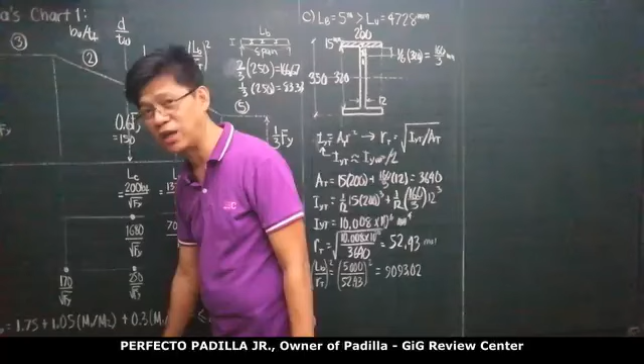Klaro tayo? So therefore dito ngayon, yung M1 is the smaller moment, kaya M1 over M2 is less than 1. However, may provision yung NSCP kasi kapag simply supported, M1 over M2, 0 over 0, indeterminate yan, hindi yan kaya ng calculator.

So pagka simply supported and cantilever, a CB will be given a value of 1. Naintindihan? And also kapag yung M1, yung moment in between, between the beam from end to end, yung moment sa gitna is bigger than the moment either M1 or M2, this will also be given a value of 1. But CB cannot be more than 2.3. In our problem, since wala mang binanggit, we just assume that our beam is simply supported. Kung simply supported, therefore our CB will be 1. So assume beam to be simply supported.

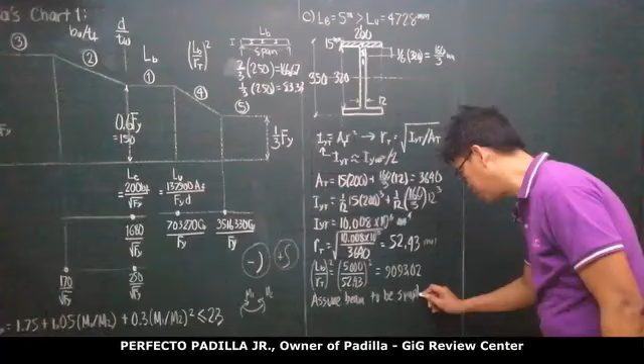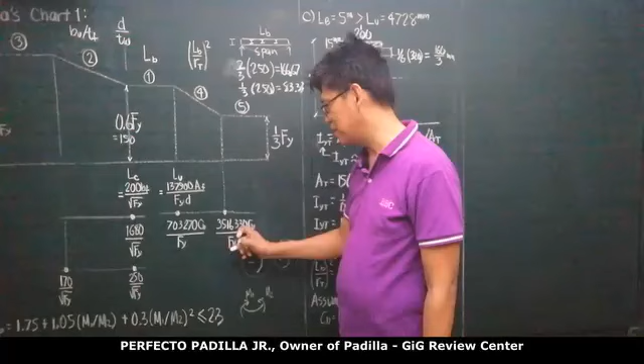Kung simply supported, yung ating CB is equal to 1. Let us compute this. Ang tatandaan nyo, etong quantity na to should be 1/5 of this. May konting discrepancy kasi yung NSCP nag-ground off, tapos nag-regenerate ng code na wala masyado yung exact 1/5. Pero the value of this must be 1/5 of this, or this is 5 times of this. So eto na lang, mas madaling memorize to kasi 7 digits: 35, 16, 330, CB.

Merong explanation sa psychology bakit mas madaling i-memorize ang 7-digit number kaysa 6 digits. Kaya yung mga telephone number natin, ba't hindi 6, ba't hindi 5 digits, di ba? Ang telephone number natin, 7 digits yan. Okay, so 35, 16, 330, CB over FY.

Ito, 1/5 of that, pwede nang hindi nyo kabisaduhin to, 1/5 na lang nito, parehas lang. Konti lang yung diferensya. Dapat eksaktong 1/5, pero nag-round up man yung NSCP. Pero yung difference, konting-konti lang, hindi siya material. Okay, so kwentahin natin to.

Yung ating 35, 16, 330 CB over FY will be 35, 16, 330 times 1 over FY. Yung FY natin is 250. Tawagin natin tong SR2, slenderness ratio 2, SR2 na lang. So dito ngayon, when we compute that, it is 14,065.32.

Tapos yung SR1, yung 703,270 CB over 250 or over FY. So this is 703,270 times 1 over 250. You compare this. This is...

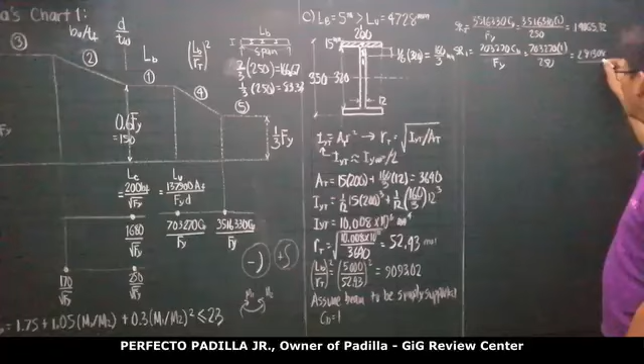2,813.08. Subukan nating i-multiply by 5. Pag minultiply mo by 5, it is 14,065.4. Ito 0.32, konting diferensya lang, di ba? So pwede nang ito divide by 5, ito yon, or ito times 5, ito yon. So ibig sabihin, isa lang sa dalawa ang i-memorize mo, okay na.

Now, our LB over RT squared is 9,000. Ito ay 2,813. Ito ay 14,000. This is between SR1 and SR2. Between siya nito at nito, ibig sabihin, nandito yung beam natin. So therefore, beam in region 4 of Padilla's chart.

Ang ibig sabihin nito, our FB allowable is between 0.6 FY and 1/3 FY. Ito, 0.6 FY which is 150. Ito is 1/3 FY which is 83.33. Kuha nyo? Maliwanag po. So paano natin ko computein? 150 kung ang value nito, ito. 83.33 kung ang value nito, ito. Ang value nito between this and this, nandito banda.

Correct? Ito yung kailangan natin na FB. You get it? So makukuha natin yan. May formula na nasa code, pero pwede na rin na ratio and proportion, parehas lang ang result. So ang gawin nyo na lang is mode stat, linear, A plus BX, straight line. Ito yung X, ito yung Y.

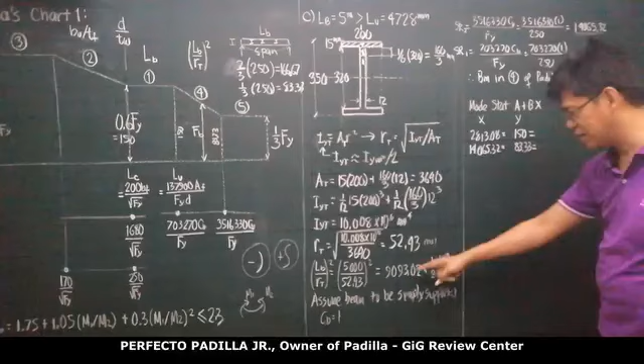83.33 equals. Kailangan natin ang Y for an X, yung X natin ay LB over RT, between 9,093.02. So pindutin muna natin yung AC, tapos yung value nito, 9,093.02. Then i-activate mo yung regression function ng calculator.

Shift 1 regression. Hanapin niyo lang yung equivalent nito sa Canon - shift up regression doon sa Canon. Pero sa Casio, shift 1 regression. Dito, pagka naka-regression ka na, meron table, papipiliin ka anong hinahanap mo.

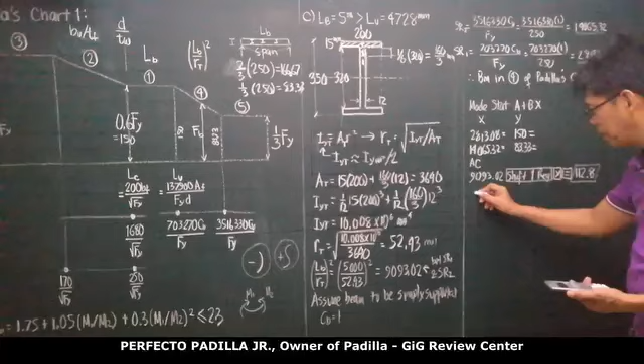Ang hinahanap natin ay Y, piliin mo yung key para sa Y, then press equals. Ibibigay sa'yo ng calculator yung sagot - yan yung FB mo. And you'll get here 112.8 megapascal.

So therefore, according to NSCP, FB allowable equals 112.8 megapascal. However, may isang provision ang NSCP, kailangan din siyang i-compare sa isang formula. Lahat nasa Padillas chart yon. Di ba napunta tayo dito dahil ang LB mo ay greater than LU. Tandaan natin, this is 0.6 of FY.

Yung 0.6 of FY na yan, compare with 0.6 of FY pero i-multiply mo ng LU over LB. Napansin niyo may bagong element na pumasok dito, yung CB. I-multiply mo to ng CB. So meron ka lang adjustment na gagawin dito, yung 0.6 FY mo i-multiply mo nito. Subukan natin - it is 150 times.

Ano yung LU? Our LU is 4728. Bali marireduce ba? So it is 4728 over our LB which is 5,000, multiplied by CB which is 1. So this is going to be 141.84.

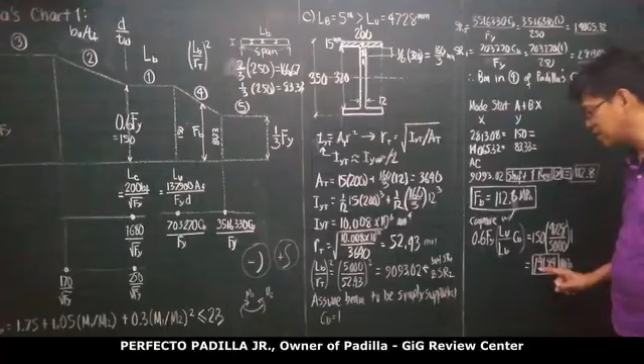Kung ang nasa choices ito yung sagot, kung parehas nasa choices, then go for the more economical one. Gusto kong examinin ninyo itong portion na to ng formula - yung portion ng formula ko na eto, minultiply ko ng LU over LB times CB. Pagmasdan niyo yun, ito yun.

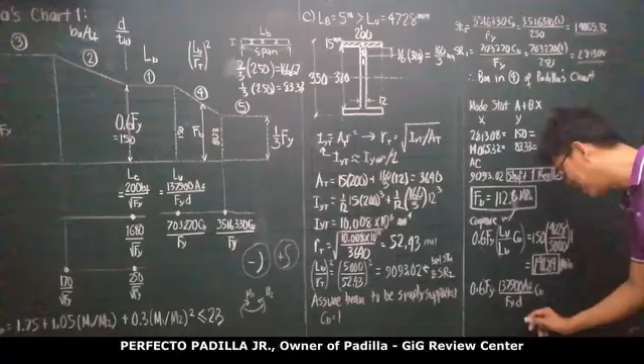So I have 0.6 of FY, ano yung LU? 137,900 AF over FYD. Tama, over FYD. So i-multiply natin ang CB. Di ba yung FY pa-cancel? Correct. Ang formula magiging ilan?

Magiging 82,740 AF CB over D. Hindi ba ito yung formula na makikita niyo sa NSCP? Tama, parehas din lang.

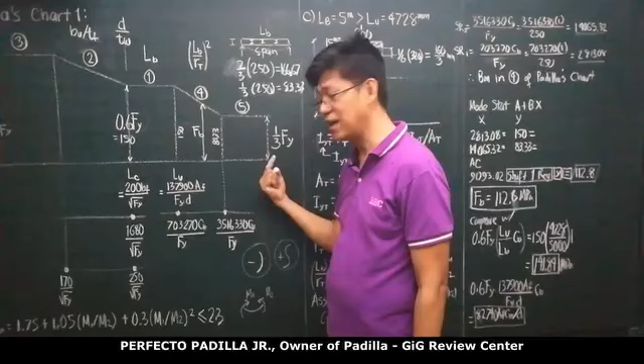Bali, pag napunta ka sa Region 4 o Region 5, kailangan i-check mo yung value na ito to be multiplied by an adjustment factor equal to LU over LB. Kasi ito is greater than this one, kaya ang multiplier mo ay reduction factor - i-reduce ito ng ratio nito sa kanito. Pero meron pang another factor, yung CB.

What about this problem? We have here a 150 mm concrete slab supported by a steel beam, simply supported at 4 meters, meaning from support to support 4 meters. Ang distance ng support perpendicular sa chalkboard is 4 meters. This beam are spaced every 5 meter center to center, meaning each beam has a tributary or assigned width of 5 meters. So ang sakop nito is 5 meters width by 4 meters length.

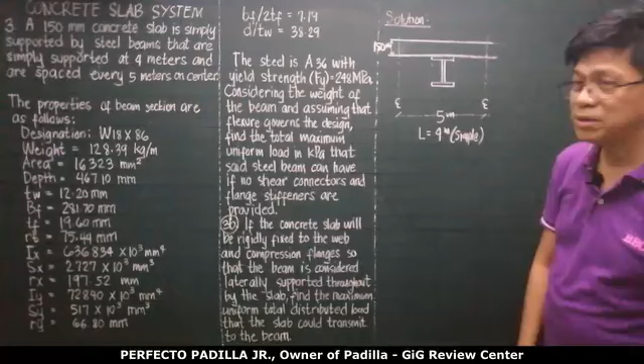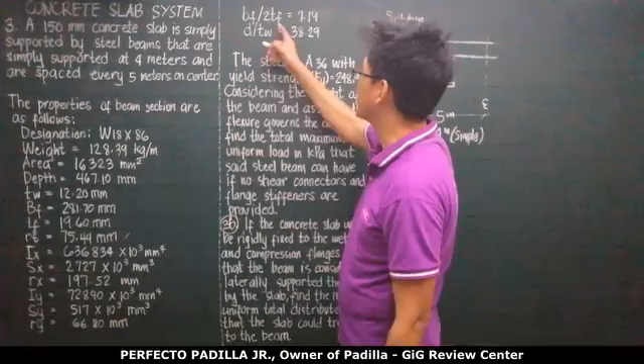Ang sabi sa atin, the properties of beam are given - yung IY, SY, IX, SX, everything, pati yung RT given sa atin. Ang sabi sa atin, yung steel is A36 with yield strength of 248. Binigay na rin sa atin yung BF over 2, ito yung BF over 2TF, at yung depth to thickness of web, binigay na rin.

Ang sabi sa atin dito, considering the weight of the beam and assuming that flexure governs the design, meaning we don't have to examine the shear, find the total maximum uniform load in kilopascal that the said steel beam can have if no shear connectors and flange stiffeners are provided. Ibig sabihin, yung slab hindi nakakabit sa beam, nakapatong lang. Kung may connection man, the connection is not sufficient in order to develop composite action.

Naintindihan? Okay, let's have it. Ang sabi sa atin, flexure ang mag-govern. In order to be safe in flexure, ano dapat ang requirement?

The maximum FB actual must be less than or equal to FB allowable. Our FB actual, since this is a simply supported beam, would be MC over I. The load is here, so the bending is about the neutral x-axis. So this is MX, this is IX. But I over C, we know that to be SX, so we can write this as MX over SX.

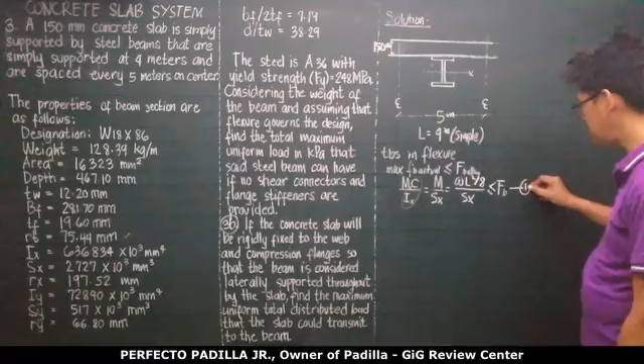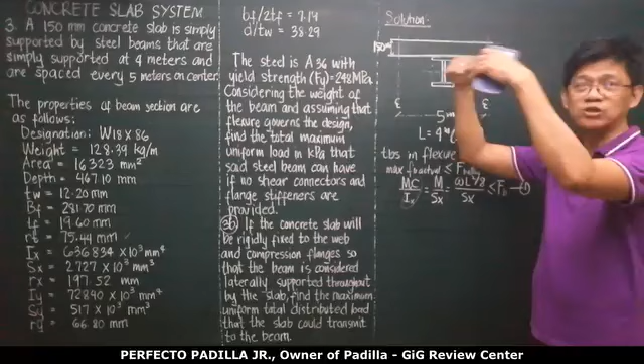We're told that our beam is not connected to the slab, meaning there is no lateral support provided except the vertical support of the beam, or the simple support of the beam. Meaning, our LB will be equal to the span, the laterally unsupported length, and this is 4 meters.

We have to compare this with LC and LU. Our LC is 200 times BF over the square root of FY. So here, you have 200 times BF, and your BF is 281.7, over the square root of FY.

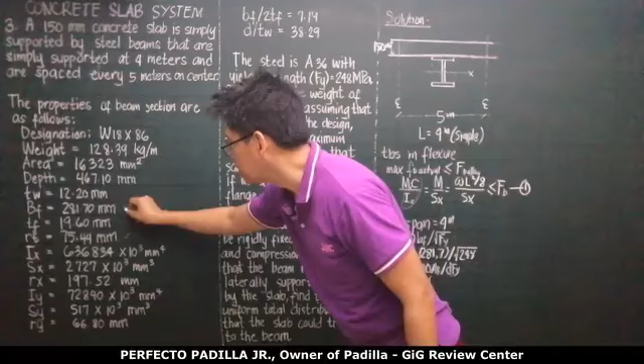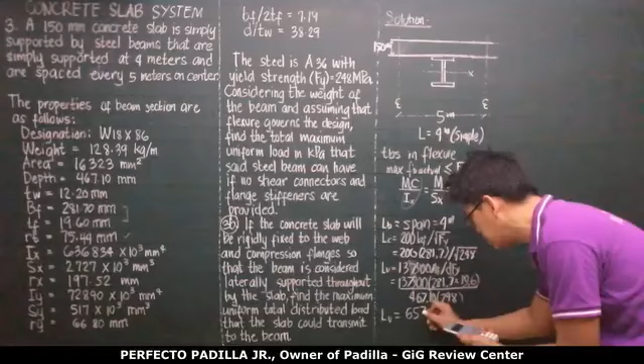This would be 281.7 times the thickness of flange, 19.6, over D, FY. Our D is equal to 467.10, times FY, which is 248. Your LU therefore is going to be 6,572.73, while the other value is 3,577.6. Our LB is 4 meters.

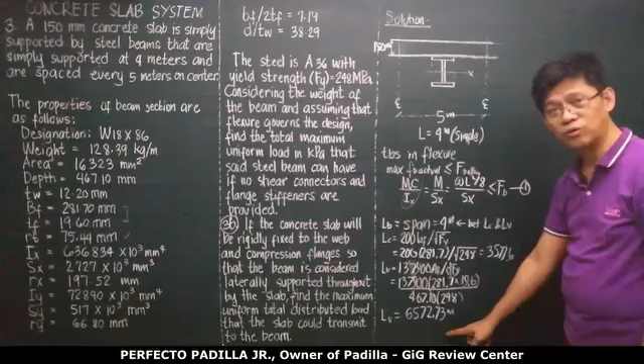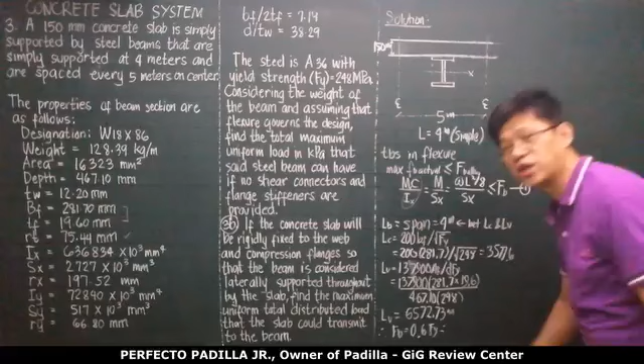It is between LC and LU. That means, if you backtrack in the Padilla's chart, our beam here will be in between LC and LU, so it's in Region 1. If we're in Region 1, our FB will be 0.6 of FY, and no need to check compactness.

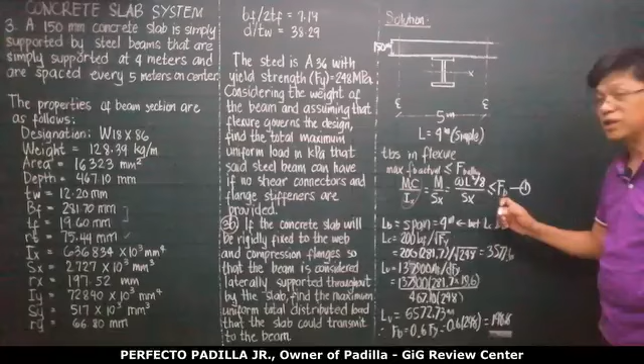So we will have here 0.6 of FY. It is 0.6 of 248, and this is 148.8 megapascal. Now that we have this, we can already solve our W.

Solving for W, substituting into equation 1, that would be W, L squared, L is 4 squared. Let's make it millimeters, so 4,000 squared over 8, over our SX which is 2727 times 10 to the 3, must be less than or equal to FB, which is 148.8.

This is megapascal, Newton per millimeter squared, everything is in millimeters. So this should be in Newton per millimeter. We can solve for W, and this will be less than or equal to 202.9 Newton per millimeter. Newton is 0.001 kilonewton, millimeter is 0.001 meter, so Newton per millimeter is numerically equal to kilonewton per meter.

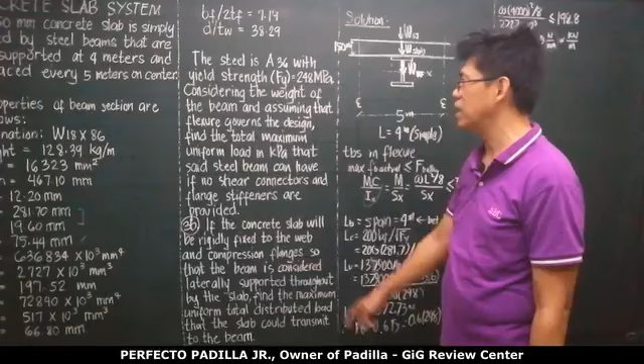So this 202.9 is the total weight carried by the beam. First, the self-weight, the weight of the wide flange. Second, the weight of the slab. Third, the superimposed load. So now, what we're looking for is the weight in kilopascal. Let's go through them one by one.

This W is simply the total weight per unit length. Our length is 5 meters, but this is in kilonewton per meter of beam. So the weight of the beam, that's already given. The weight of the beam is 128.39 kilograms per meter.

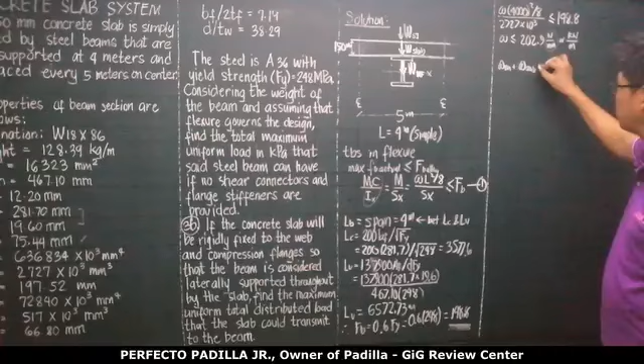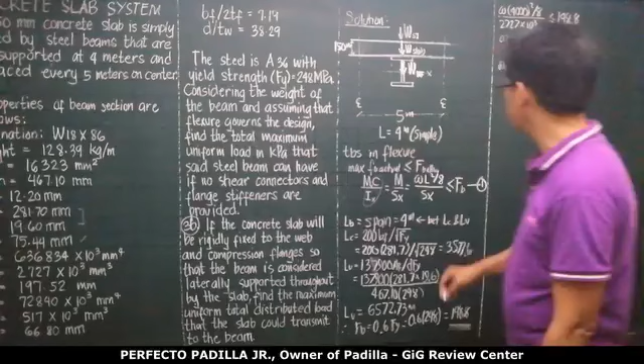So that would be weight of the beam plus weight of the slab, uniform weight, plus superimposed dead load, must be less than or equal to 202.9. The weight of the beam is 128.39, this is in kilogram per meter, already in meters. Let's just convert this to kilonewton.

The density of water, 1,000 kilograms per cubic meter, in kilonewton is 9.81 kilonewton per cubic meter. The kilogram will cancel, leaving kilonewton per meter.

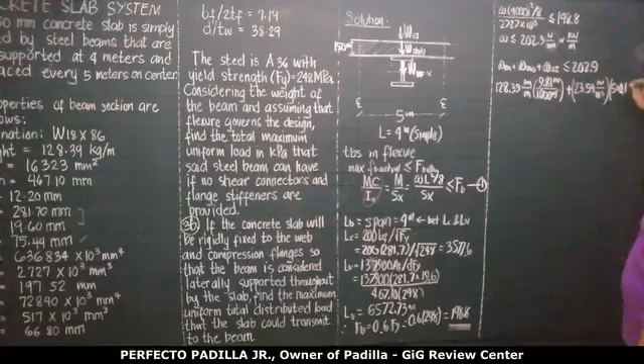Plus the weight of our slab. What's the weight of the slab? Density of the slab, density of concrete, if not given to us, take it as 23.54 kilonewton per cubic meter, multiplied by the area of the tributary slab, which is 150 by 5 meters. But remember this is kilonewton per meter, so 23.54 kilonewton per cubic meter times the area, 5 meters times 0.150, giving us kilonewton per meter.

Plus the superimposed dead load, which is in kilopascal. Let's call it W superimposed, to be multiplied by the tributary width only, since what we need is kilonewton per meter. So the tributary width is 5 meters, giving us kilonewton per meter, must be less than or equal to 202.9.

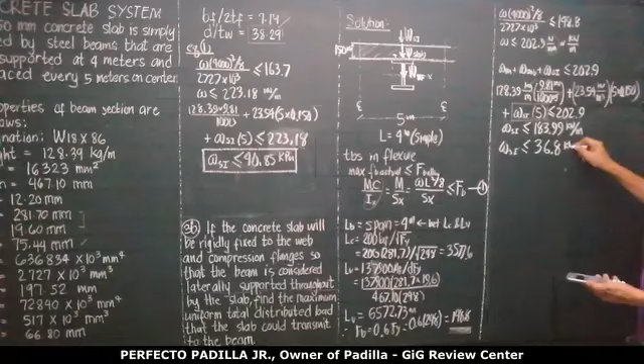Solving for our W superimposed, this must be less than or equal to 183.99 kilonewton per meter, but that's WSI times 5. So if you divide by 5, WSI is going to be 36.8 kilonewton per meter squared, or kilopascal. This is the superimposed load.

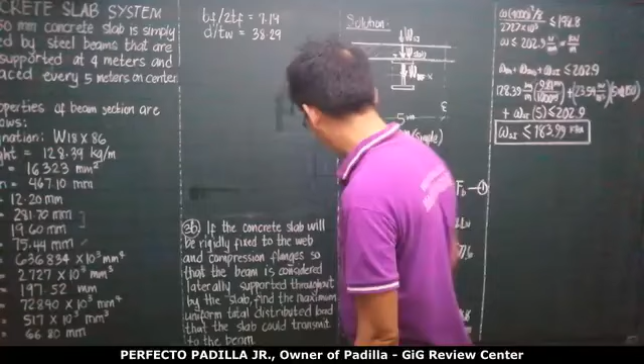Paano tong letter B? The concrete slab will be rigidly fixed to the web and the compression flanges so that the beam is considered laterally supported. Ang ibig sabihin, kung ito yung beam, meron kang mga shear connectors dito, yung beam hindi makaka-deflect laterally.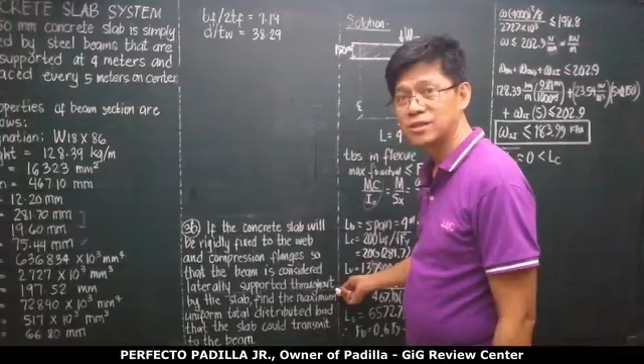So in this particular problem, our LB laterally supported is practically 0, or hindi man 0, small. So therefore we can safely assume that it is less than LC, kasi LC is 3,571.6. Sabihin na lang natin ang spacing nito every 1 meter, o 1 meter is less than LC, so it is laterally supported throughout.

Okay, so basta sinabi to, then LB will be practically 0, less than LC. So kung less than LC dun sa Padillas chart, you will move to the left. Ang i-check natin ngayon, yung web.

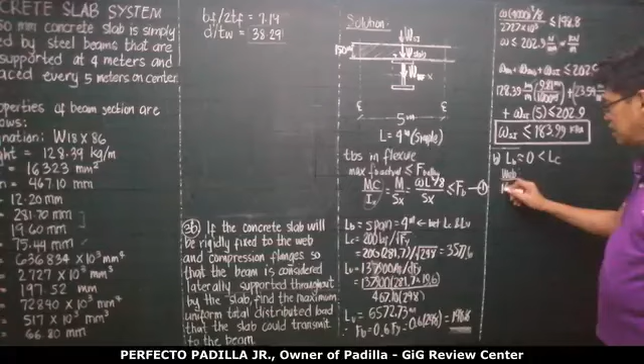Now the beauty here is binigay na sa atin yung depth to thickness of web ratio, 38.29. And we compare that with the AISC limit, that is 1680 over square root of Fy. So this is going to be 1680 over square root of 248, and this is going to be 106.68. So as we can see, our depth to thickness of web ratio, D over TW, is less than the limit set by NSCP, less than 1680 over square root of Fy.

So therefore, pasado yung web, web is compact. So we now check, nasa region 2 pa rin tayo ng Padillas chart, no? So we now check our flange, yung unstiffened flange natin, take note, given yung BF over 2TF, yung BU over TF.

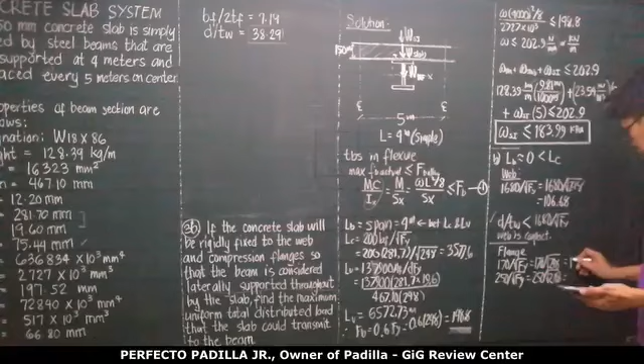So therefore, i-check natin siya sa 170 over square root of Fy and 250 over square root of Fy. So this is 170 over square root of 248, ito is 250 over the square root of 248. So this is 10.8, while this one, 15.88, okay, while this one is 7.14.

7.19 is less than this. So our BU over TF, which is given as 7.14, is less than 170 over square root of Fy. So therefore we will go to the third region of Padillas chart, therefore pasado, yung flange is compact. So ang ibig sabihin dito, our section is fully compact.

Our FB allowable is supposed to be 2/3 Fy, pero ang NSCP kasi, linimit lang siya sa 0.66 Fy. So this is 0.66 times 248, so this would be 163.7.

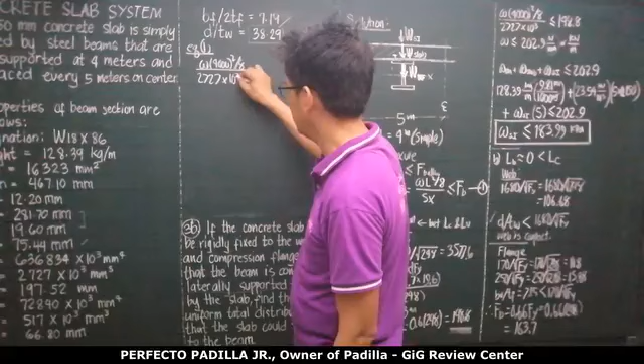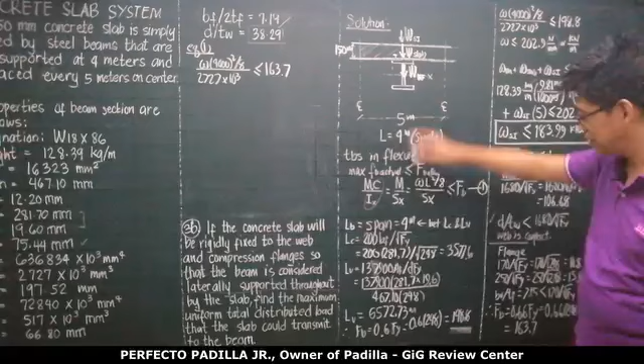I-substitute natin ngayon dito sa equation 1. You'll have here equation 1, you have W times 9,000 squared over 8 over Sx, which is 2727 times 10 to the 3, must be less than equal to FB, which is 163.7. So sa konting idinagdag mo na shear connectors, yung allowable stress natin from 148 na increase sa 163.7.

Okay, so in here you'll be able to get our W total must be, this is 223.18 kilonewton per meter, newton per millimeter, which is numerically equal to this. And this is the same, this is equal to weight ng beam, weight ng slab, weight ng superimposed load.

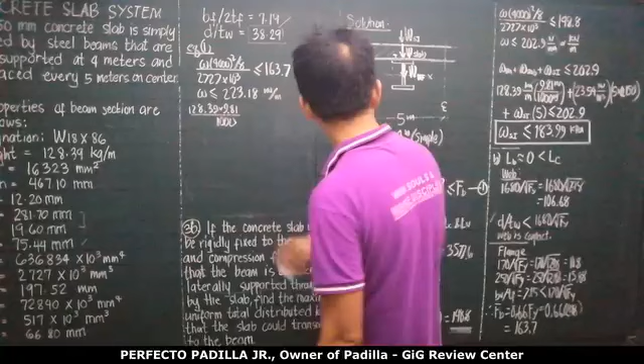So kopyahin lang natin to, 128.39 times 9.81 over 1,000, ito yan sa weight ng beam. Plus yung weight ng slab, 23.54 times 5 by 0.150. Plus yung weight ng superimposed load multiplied by 5 meters.

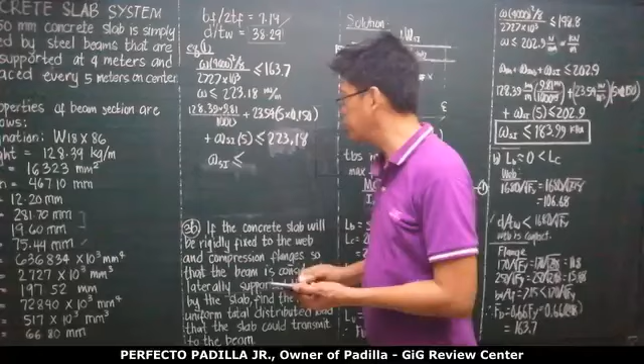So this must be less than or equal to 223.18. Okay, nakuha? So therefore W superimposed must be less than or equal to 40, this is 40.85 kilo Pascal. Okay, maliwanag? Naintindihan?

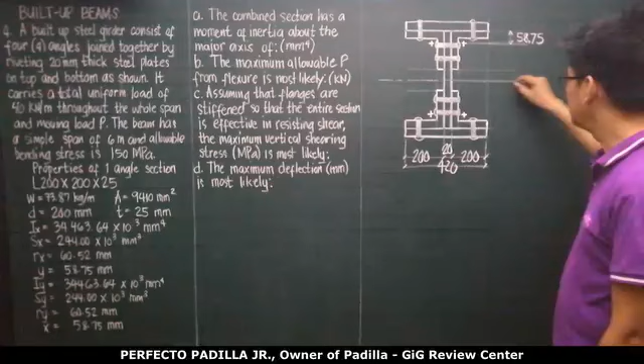I would interpret the neutral x-axis. How do we do this? So we are asked here to find the moment of inertia about the neutral x-axis. So let's have this, yung moment of inertia nila will be the moment of inertia of the angle bars, then you have to transfer it to the neutral axis, then same thing with this plate, and the vertical plate.

The vertical plate, since this is a symmetrical figure, for the vertical plate its neutral axis coincides, its centroid coincides with the centroid of the entire section. So first, let me solve all the areas, ha?

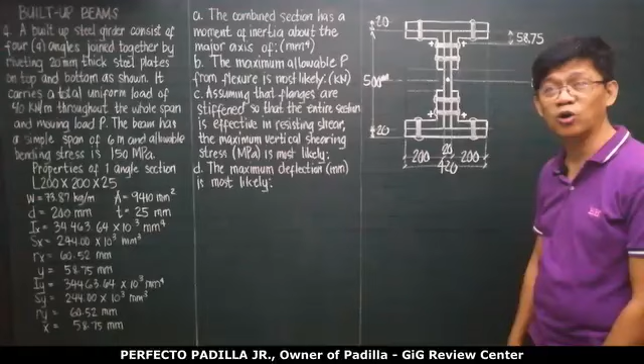Okay, so yung total area natin, our total area is 4 times the area of angle bars, it will be 9410, 4 times 9410, plus area of these two plates, the centroid is here and here, will be 20 by 420, 2 times 20 by 420. Plus the vertical bar is 20 by 500, and that is only one piece. So computing this, you'll get here the total area is going to be 64,440.

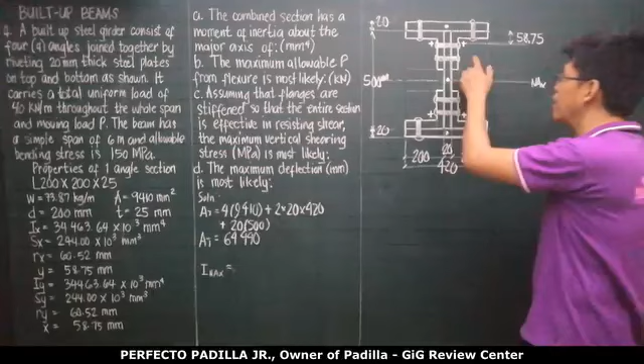Now, for the moment of inertia about the neutral x-axis, let's use the angle bar. The centroid of the angle bar is here, indicated by the X. So this is 58.75. This is 58.75 because it's an equal angle bar, 200 by 200 by 25 designation, meaning the thickness here is 25.

So the moment of inertia of this angle bar, given as Ix, that is 34.463, 64 times 10 to the 6. I just moved the decimal by 3 places.

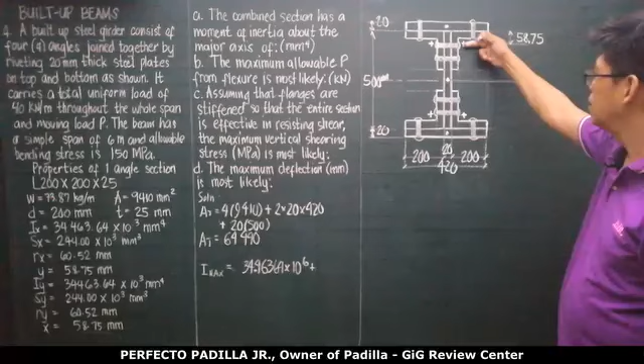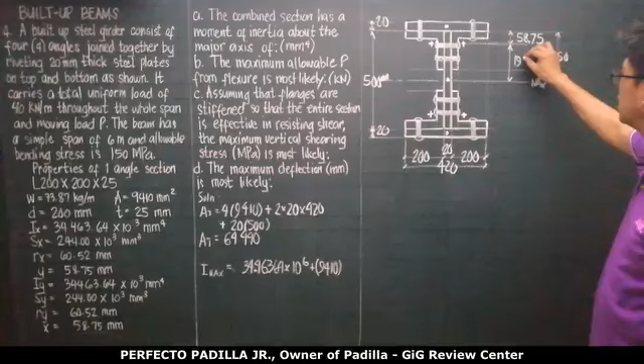Now we transfer that from here to here. So plus area of the angle bar, which is 9410, multiplied by the transfer distance. This is 58.75. If this is 500, this is 250. 250 minus 58.75, so this is going to be 191.25. So this is times 191.25 quantity squared, area times distance squared. And there are 1, 2, 3, 4 of them, so all of this must be multiplied by 4.

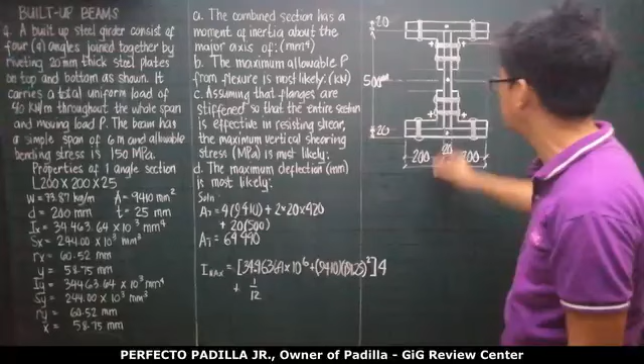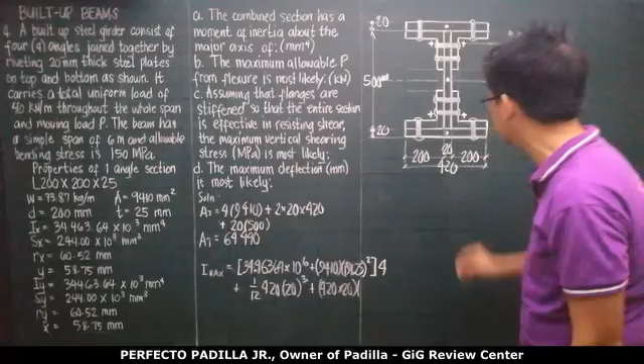Plus the contribution of this plate, that is plus 1/12 of base times height cubed. The base is 420, the height is 20. So 420 times 20 cubed. But we've got to transfer it from here to here, so the transfer distance is 250 plus 1/2 of 20, which is 10, giving 260 from here to here. So plus area, the area is 420 by 20, and the transfer distance is 260 squared. And there are 2 of them, so times 2.

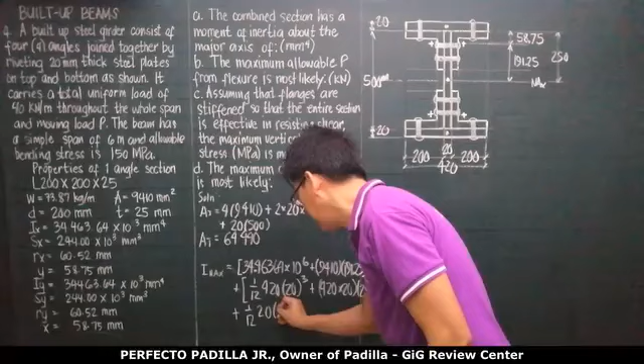Plus this vertical plate, no transfer needed because its centroid coincides with the global centroid. So 1/12 base, the base is 20, the height is 500. So 1/12 of 20 by 500 cubed. You'll calculate all of this and you will be able to get I about the neutral axis.

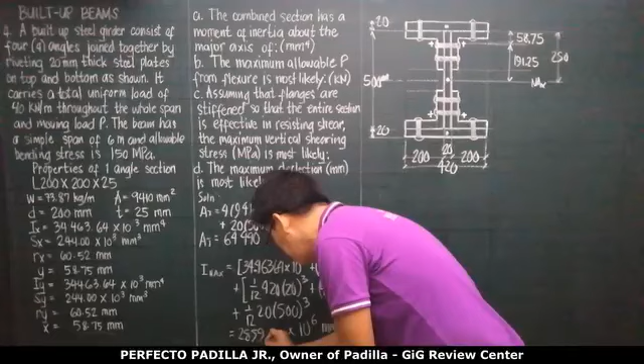So computing this will be 2859.17 times 10 to the 6 millimeters to the fourth. So this is our I about the neutral x-axis. You follow? Okay.

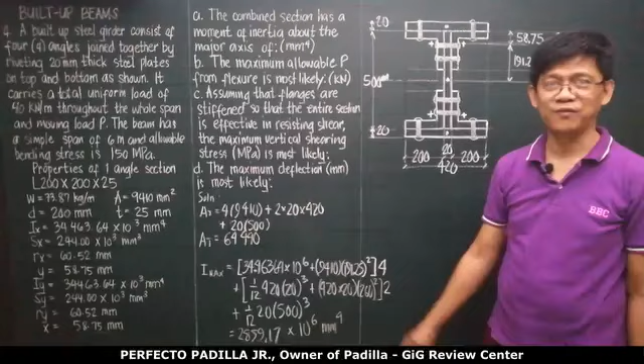Let's have letter B. The maximum allowable load P from flexure is most likely what in kilonewtons. So in order to be safe in flexure, our maximum FB actual must be less than the allowable bending stress. The FB actual is MC over I. The I here is always about the neutral axis. So understood that our axis of loading is about X.

So neutral X-axis, this is moment about X. This C, Cmax, this is also Cmax, must be less than or equal to FB. FB is given here as 150 megapascal. We don't need to solve that; it's given in the problem that the allowable bending stress is 150 megapascal. So this must be 150.

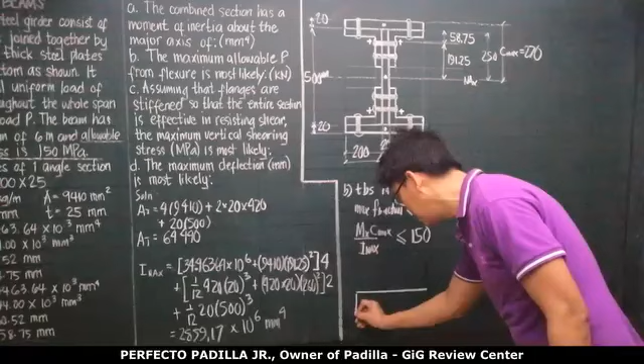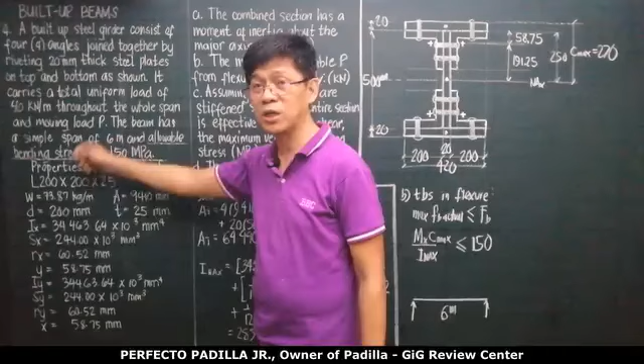But the moment about X, what we need, since it's maximum, must be the maximum moment. Now, our beam, remember, is simply supported at a simple span of 6 meters. It carries two loads: a uniform load of 40 kN per meter throughout the whole span, and a moving load P. So for maximum moment, to produce this, of course, this is the uniform load W, which is total, 40. And also the moving load P. The moving load P, in order to produce maximum flexure, must be acting at the center.

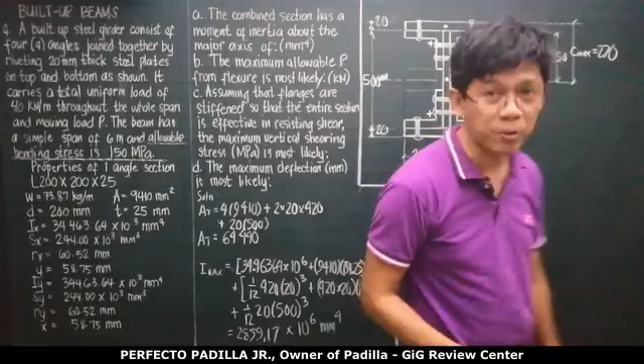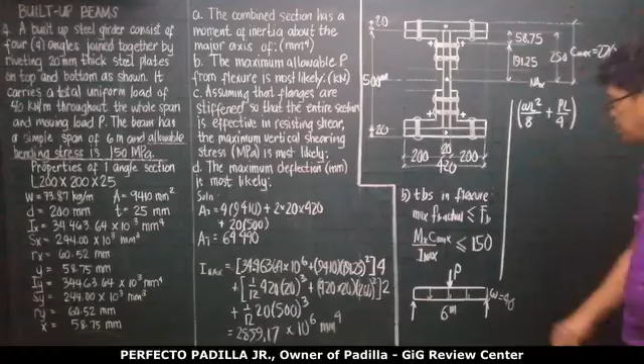So by method of superposition, the maximum moment due to W must be WL squared over 8, plus the maximum moment due to P at the center, which is PL over 4. Multiplied by Cmax, this is 270. Let's write first Cmax over I. Our I here is this, but let's write it as I about the neutral x-axis. And this must be less than or equal to 150.

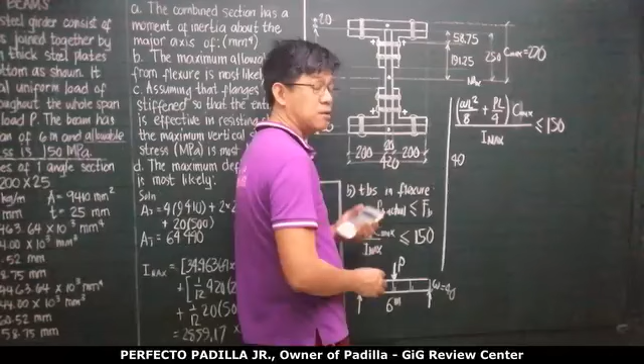So substituting the values, you have W, which is 40 kilonewton per meter, or newton per millimeter, but it's better to use kilonewton per meter. So multiplied by L, our L is 6 squared over 8.

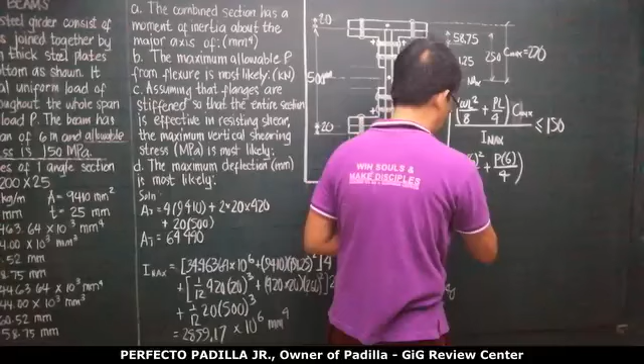Naka-kilonewton meter, moment yan. Kilonewton meter, plus P in kilonewton times L meter, kilonewton meter over 4. Kilonewton meter is how many or how much newton millimeter? 1,000 newton, 1,000 millimeter. So this is 10 to the 6 newton millimeter, times Cmax of 270 all over I.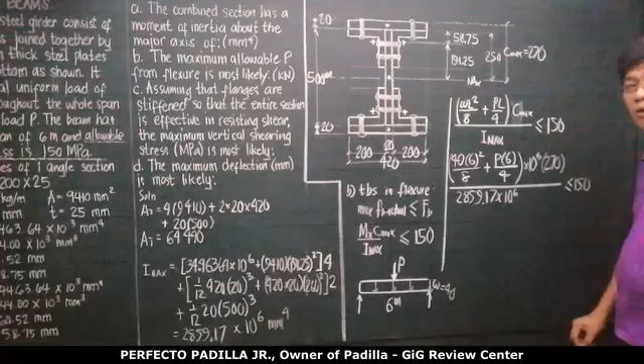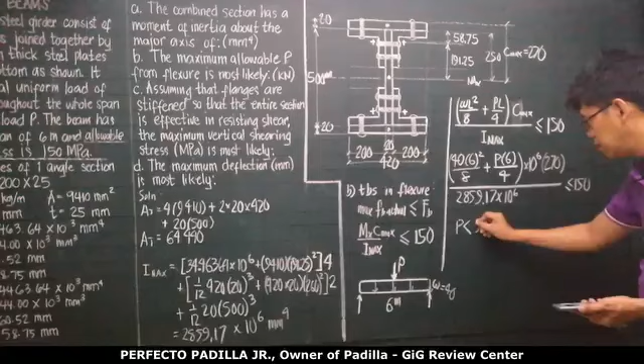Yung I natin is 2859.17 times 10 to the 6. And this must be less than or equal to 150. One equation, one unknown, will be able to solve P. And P in kilonewton will be 938.95 kilonewtons. So, ito yung ating value ng P. Maliwanag? Okay.

Paano yung letter C? Assuming that the flanges are stiffened, so everything here are stiffened, so that the entire section is effective in resisting shear. The maximum vertical shearing stress is most likely what? Ang shearing stress, vertical shearing stress, FV, is equal to what?

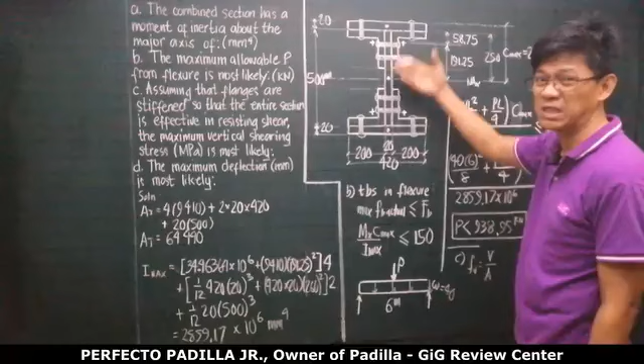V over area. Dahil ina-assume natin na lahat ay stiffened, may stiffener siguro na hindi lang pinakita, then etong area natin, total area. And yung V natin for maximum FV, FV max, this must be V max.

Now, remember that the load P is moving. Nasaan dapat yung P in order to produce maximum shear? Wala sa gitna. Dapat tong P malapit sa left or right support. Almost nasa support. Ganito. So, in order to produce maximum shear, dapat ang loading will be, ito yung ating support.

Dapat ang loading, ito yung W, pero yung P is nandito. I would interpret that in this problem, letter C is just a continuation of this, wherein P will be taken as this, so that flexure will govern. At dito, ang maximum shear natin, yung Vmax, will be equal to R at the left. Tama? Maliwanag. So, R at the left will be equal to yung P, solo lang niya. Will be equal to P plus yung W, hati sila.

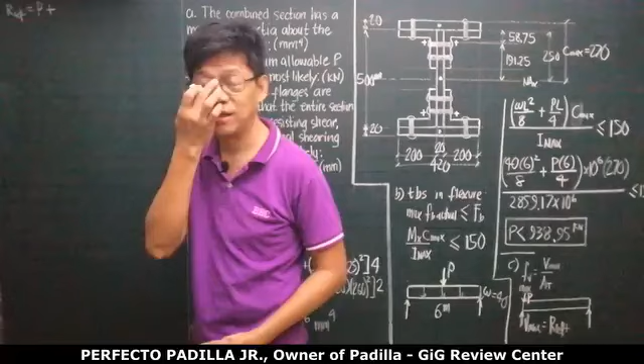So, that is 40 kilonewton per meter times 3 meters. 3 meters dito, 3 meters doon. So, this will be P plus 120 kilonewtons. Ito yung ating V max.

So, therefore, our FV max is going to be maximum shear P. Ano yung P natin? 938.95. So, this is 938.95 kilonewton plus 120 kilonewton. Kilonewton is 1,000 newtons. Over the area, the total area is, as we solved kanina, divided by area, which is 64,490. So, if you compute this, you'll get 16.433 MPa. Newton per millimeter squared or megapascal.

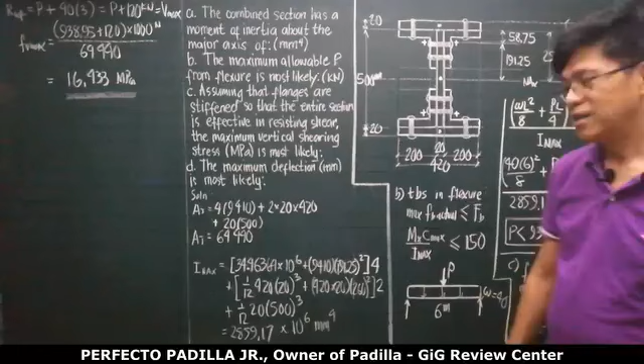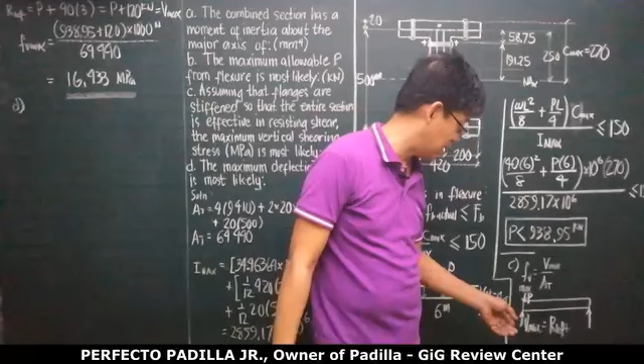Maliwanag. Now, ang susunod na tinatanong sa atin is we are asked to find the maximum deflection. For maximum deflection, nasan dapat yung moving load P? Ang maximum deflection natin, P, dapat nasa center. Ito yung loading for maximum deflection.

So, pagka nasa gitna yung P, yung Y max natin, due to W, dalawa yan, di ba? Due to P, yan yung isang rat. Isang rat. R is 4, T is 8. This is PL cube over EI. Ang unit ng EI, megapascal times millimeter squared, kilonewton meter squared. Ang unit ng EI. So, dapat ito kilonewton, dapat ito meter cube. Para divide by meter squared, meter.

Plus, due to W, ano naman yung sa W? Motor. M is our code for 3, T for 8, R for 4. 5 motor. WL to the 4th over EI. So, this is still, so alam natin yung E, di ba? Ang E natin is 200 gigapascal.

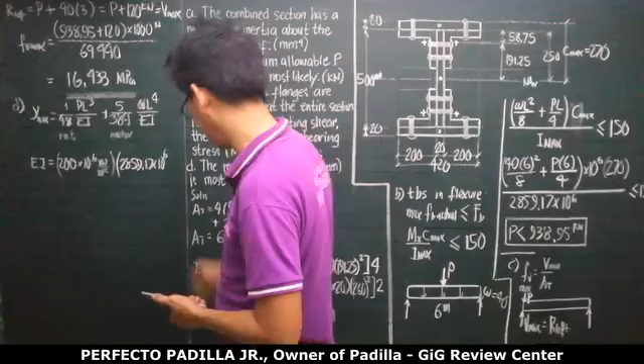Computing ko lang yung EI. Para isang compute lang tayo. Our EI is 200 gigapascal. Gawin natin kilonewton meter squared. 200 gigapascal, 10 to the 9 pascal, is 200 times 10 to the 6 kilonewton per meter squared, kilopascal. So, multiplied by our I, our I is 2859.17 times 10 to the 6 millimeter to the 4th is 0.001 or 1 over 1,000 meter to the 4th. Or that is 10 to the minus 12 meter to the 4th. Kaya to the 6, to the 6, to the negative 12, cancel lang lahat yan.

So, ang EI natin therefore is going to be 571,834 kilonewton meter squared. So, we now substitute our Y max is going to be equal to due to P, it's P, ano yung P natin? 938.95 times L cube, 6 cube over 48 EI. 48 times 571,834. 571,834. Naka-kilonewton meter squared, eto kilonewton meter cube, meter ang sagot.

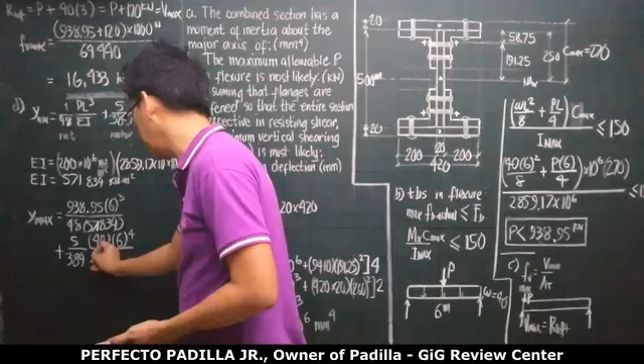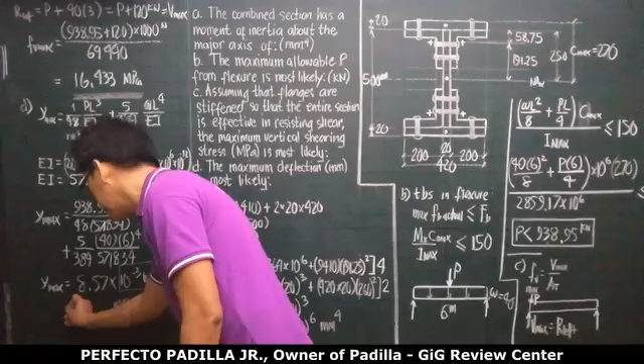Kuha? So, you'll get this as 8.57 times 10 to the minus 3 meter. 10 to the minus 3 meter is millimeters. So, this is 8.57 millimeters. You follow? Sige, kopya.